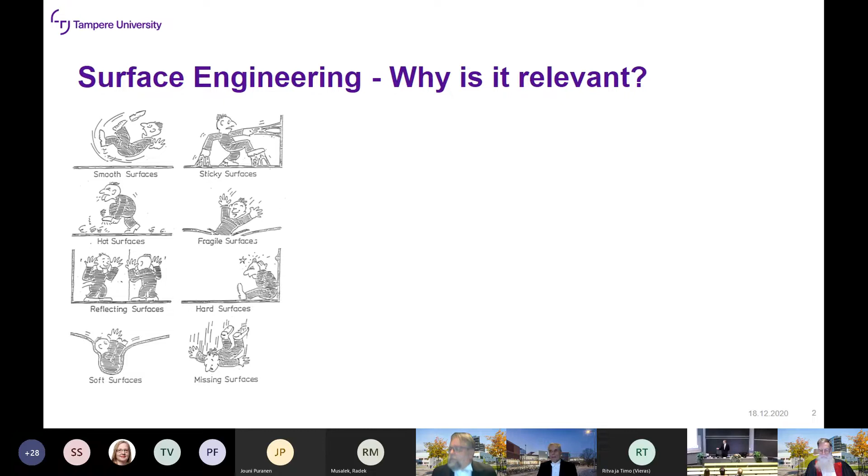Some everyday examples of this could be painting a car or a house, or lining a football field with fake grass, for example.

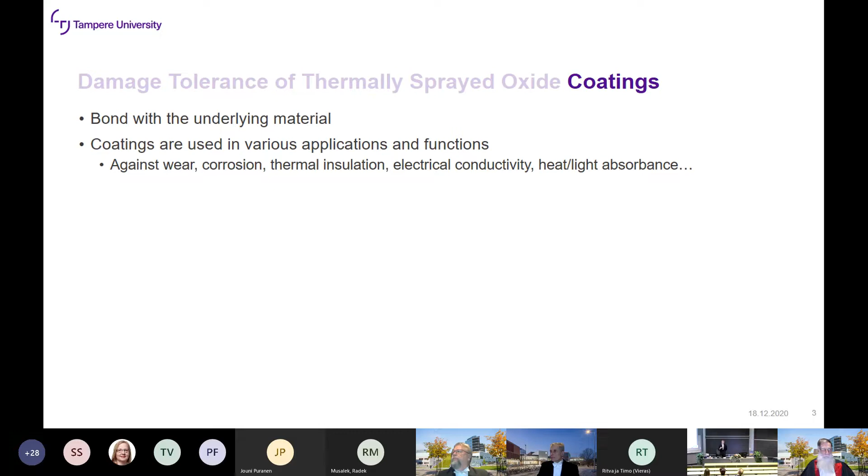Coatings are surfaces that bond with the underlying material, separate from the parent material. They're used in various applications in industry for wear and corrosion protection, among others.

They can be thin, which would be under 10 micrometers. For example, this tool tip insert could be coated with a thin coating. What I call thick coatings would be upwards of 10 micrometers up to 1000, so 1 millimeter. Not really thick, but still in the scale of our studies, that would be thick.

And above that, I would like to call these clads, because you can clearly tell two different layers of materials separate.

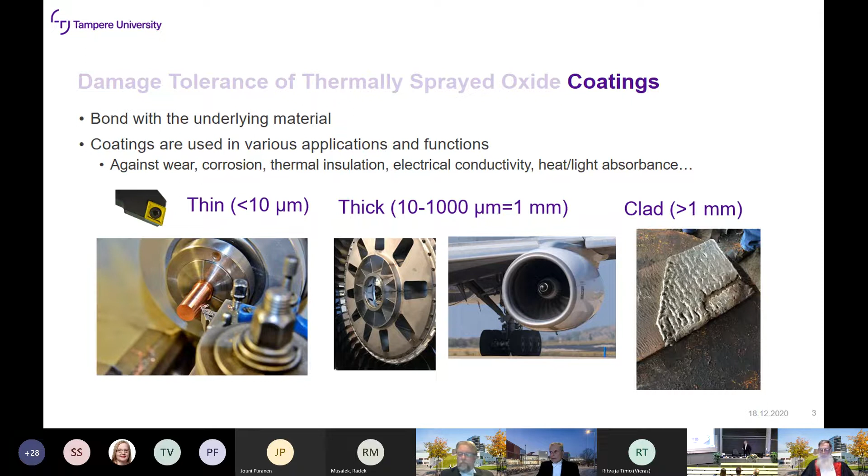What is thermal spraying then? Thermal spraying is a method of manufacturing thick coatings, so between 10 and 1000 micrometers. They can be virtually from any material group, so metals, hard metals, cermets, ceramics, or polymers.

And to make those, we need heat to melt a material that can be in the form of powder, wire, cord, rod, or more recently liquid suspensions or solutions. And once we have this molten material, we need to propel it towards a surface which we want to coat.

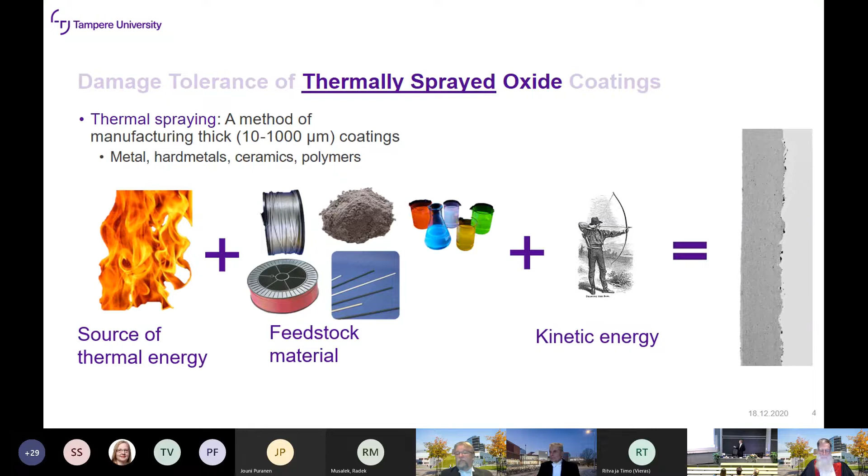After this, the molten material hits the surface and makes a coating such as this one. The gray part here would be the coating, ceramic in this case, and a metal substrate.

These coatings are used in, for example, batch production, such as this ball valve for process industry that's being coated with a hard metal coating. We coat one ball and we stop the process, switch it up, and resume with the next one.

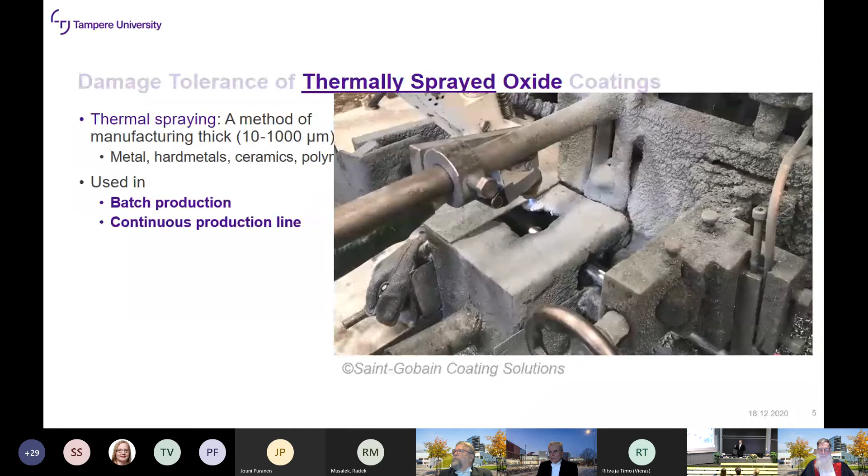And it can be used in laboratory scale. Like in this case, there is a coating for my study being made. So even really small pieces, downstairs here at the university.

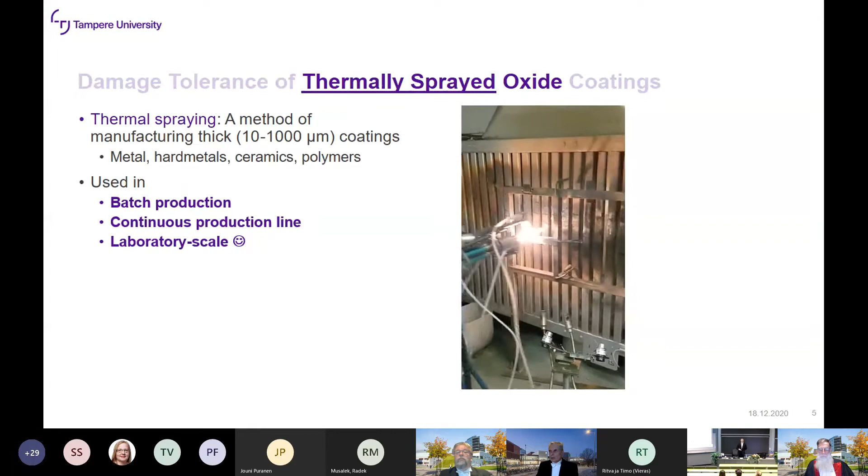Some common applications of thermal spray coatings are, for example, possibly the biggest market is in aerospace, in turbines, as ceramic coatings against heat to prevent the metal from melting or heating excessively. And in the landing gears of airplanes to replace hard chrome that is nowadays a toxic material to use.

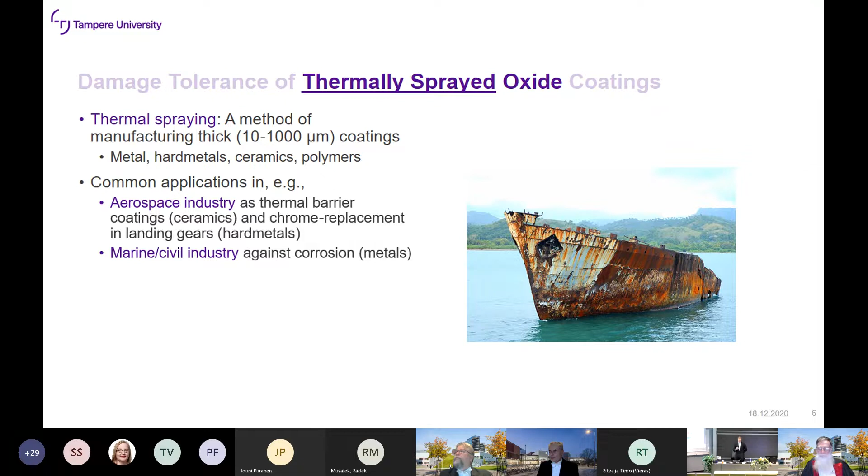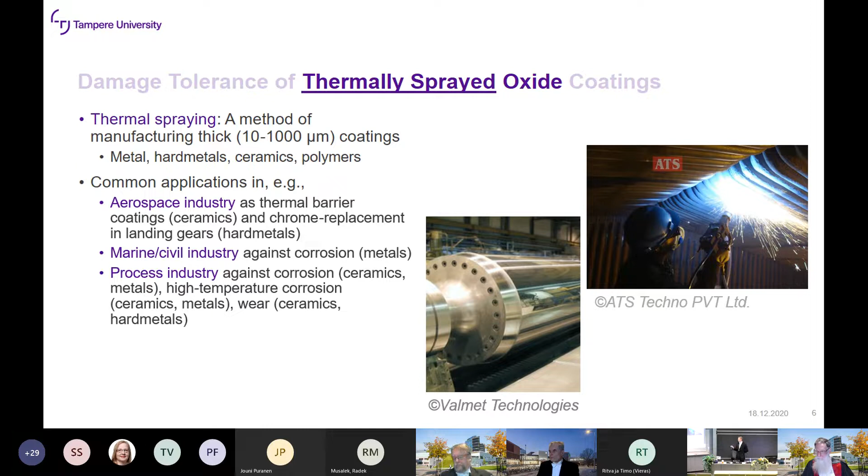It's also used against corrosion quite widely in various industries. Metal coatings, shipbuilding is one big area where we use corrosion protection coatings. And it can be used in process industry also against wear or corrosion or both, such as paper machine rolls or in energy production boiler tubes.

Now, thermal spraying itself is a value-adding technology, meaning that in most cases, the components would work without a coating quite well, probably a bit shorter time, but they would work. By applying a coating, we can increase the lifetime of the component, maybe 5 times, maybe 10 times, maybe 2 times. And in some cases, it's not worth it to apply a coating.

But thermal spraying by itself usually can be replaced if there is a better option, for example, from thinner coatings in thin film technologies such as chemical vapor deposition or physical vapor deposition, or thicker coatings, clads from laser cladding, PTA or welding. So it is really a niche technology between thin coatings and thick coatings, and its use is quite niche as well.

And typically, the technology develops from industry pull. There is some current need of a current component that could be made even better with a coating. It's not so often we see this type of research from the bottom up, starting from scratch to build some new application. But that happens as well sometimes.

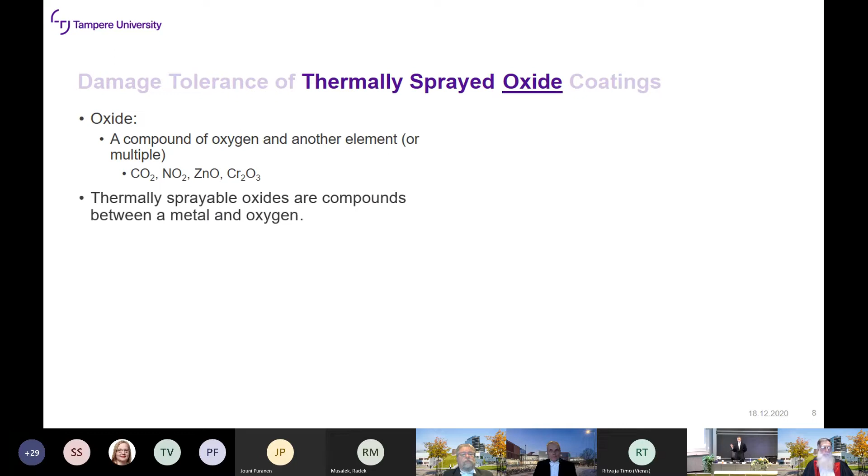Then what are oxides? It's a compound of oxygen, O2 or O in a compound, and another element or multiple. And what we thermal spray are compounds of metal and oxygen, which are ceramics - it's a fancier way of saying oxides. Usually we talk of ceramic coatings, but they're most often oxide coatings. And the most often used are aluminum oxide or alumina, chromium oxide or chromia, titanium oxide or titania in my study.

Possibly the most used is zirconium oxide, but pretty much any oxide could be sprayed. And it can come in almost all feedstock forms, not wire, because ceramics are difficult to make a wire from. Now, thermally sprayed oxide coatings, what are they? They are chemically stable for corrosion protection if they're dense. They resist sliding wear, also other types of wear, but really against sliding wear they're really good. And they have good release properties where that's needed, low surface energy, and they're hard.

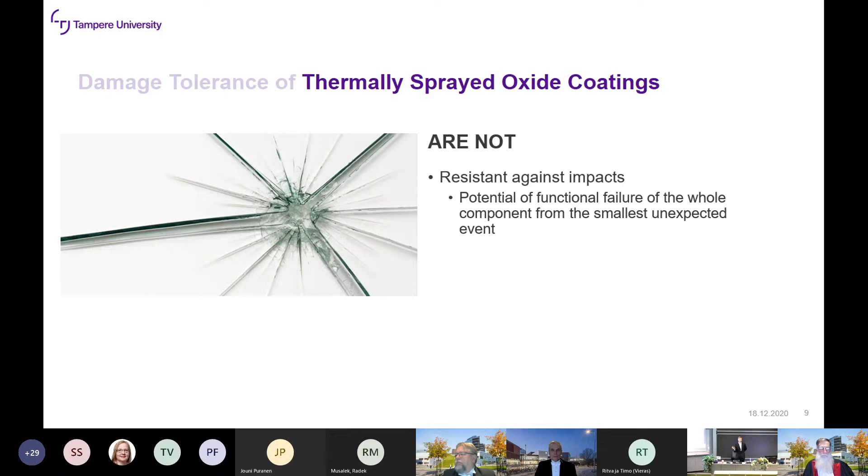What they are not is resistant against impacts. As many of us know, ceramics are very easy to crack. And that, in the case of a functional coating, often means that the whole component is out of use after this. So this would be the industry pull in my case. The damage tolerance would need to be increased, so less cracking of the components.

And thermally sprayed oxide coatings have a ton of flaws. The process is stochastic. There are uncontrollable or difficult to control factors which lead to porosity, unmelted particles, cracks, etc. And it's very difficult to eliminate these totally. So most often we try to find the best balance and control them as well as we can, and to find the optimal properties, which means compromise. Some property goes up, some goes down. Most often we haven't found the perfect solution to make everything better.

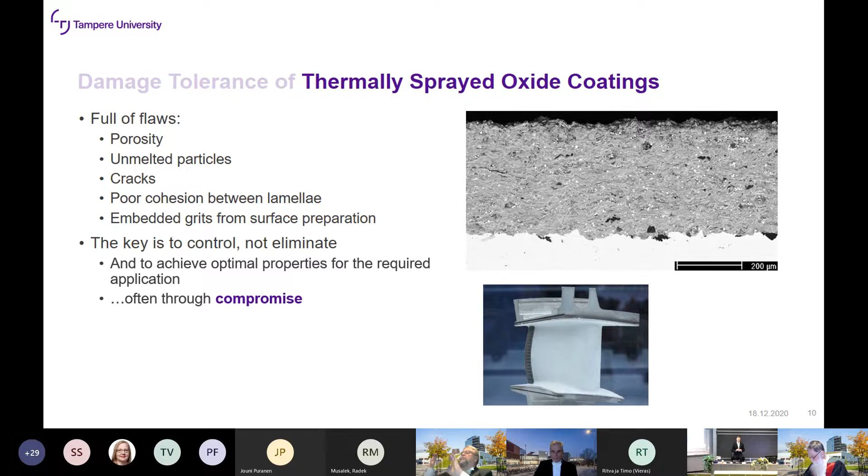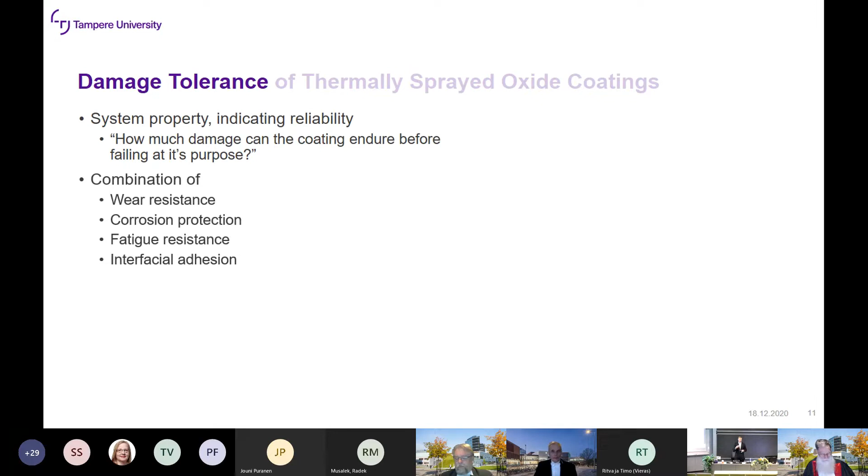Now, damage tolerance itself, it's in the name, but in simple terms, it means how much damage the coating can endure before it's unusable. And it's a combination of many things. It's not just wear, but there can be fatigue from thermal cycling, adhesion problems, corrosion. And in this study, for example, we've studied the cracking behavior up close, trying to quantify this phenomenon.

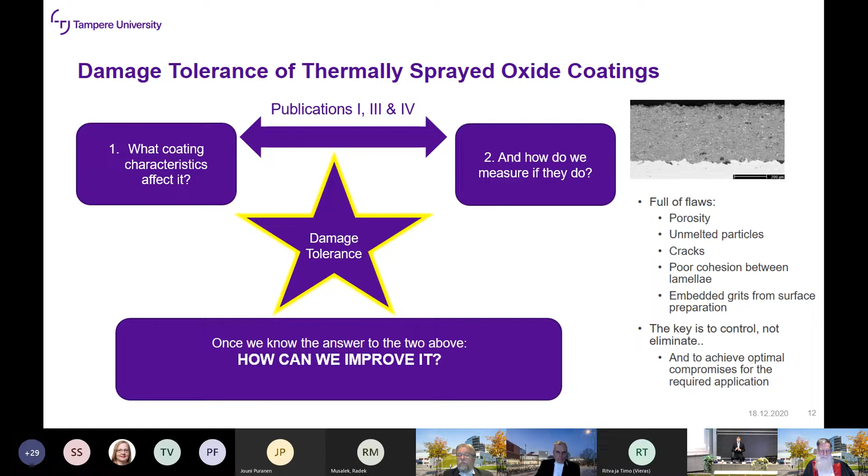Okay, so finally, the holy grail is damage tolerance. So how did we approach it? First, we need to figure out what coating characteristics are at play. How do they affect damage tolerance? And how do we measure if they do, which is a challenge by itself. About half of the thesis is about these topics. And once we know this answer, how do we improve it to make a better coating? Roughly half of the thesis is dedicated to this topic. Thank you.

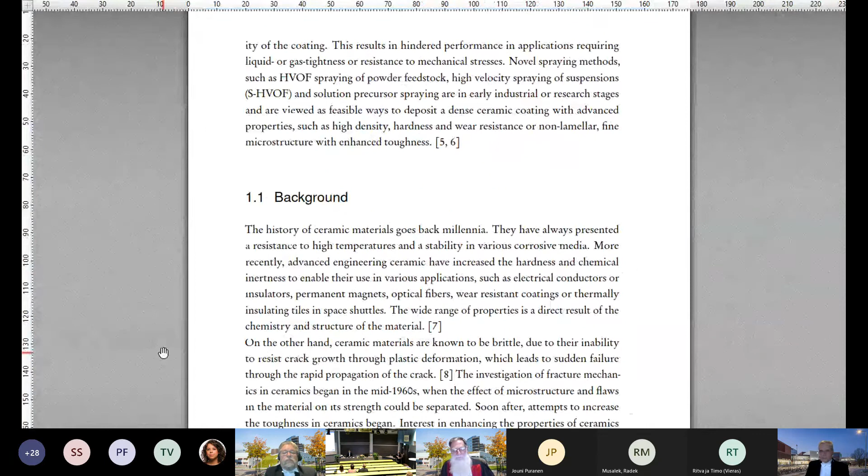So let me actually pick up on that, if I may. One of your key ideas, Jarkko, seems to be toughening and strain tolerance, looking at stresses, and I'm referring to the introductory pages of your thesis, pages 23 to 25. There is a lot of discussion and a lot of thoughts about toughening. So this is another holy grail with regards to this technology. Yeah.

And I don't completely understand strain tolerance. So could you please explain to me, or actually to the world who is tuning in, what you mean by strain tolerance for thermal spray coatings? And it'd be interesting to get your thoughts about how strain tolerance can be controlled. Would you be able to just expand a little bit on that, please? Is my question making sense? Yeah.

Well, first of all, it's not a question. This is just an inquiry, right? Yeah. Strain tolerance, I see it as, for example, with this coated component, you would pull it apart, the substrate deforms elastically, and the ceramic coating at some point couldn't take this strain anymore and would have signs of cracking. So whether it's 1% of strain or 0.5%, 0.3%, to me the first sign of cracking would be the limit for this coating. And that is my idea of strain tolerance in this thesis.

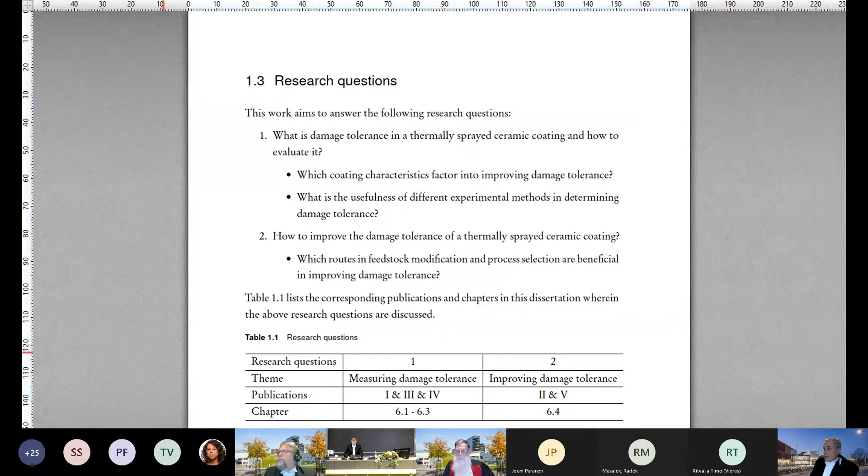Okay. When we advance from this background, we come to the aim of the work. I think it's well defined, twofold. There's like two frontiers. One is the understanding and characterization of damage tolerance, crack propagation resistance, impact resistance, and second goal is how to improve them. So how to understand, how to improve. It's a lot of things, and it's divided into research questions, and the answers could be found in publications as in table 1.1.

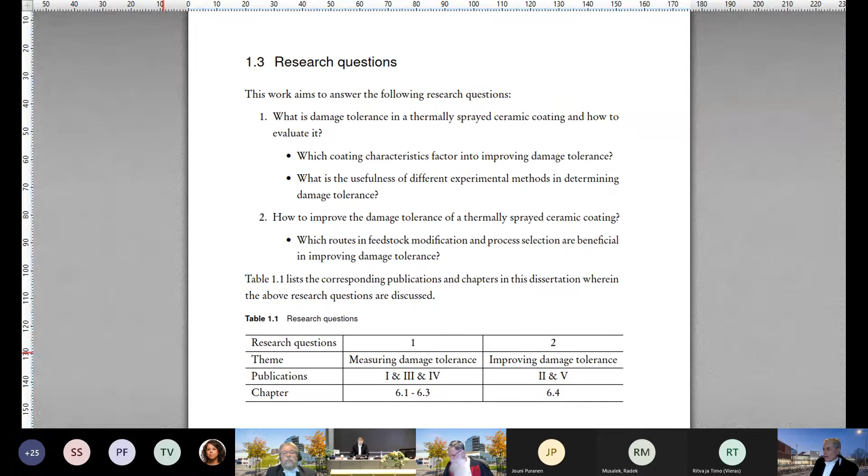If we come to the very introduction of the thermal spray, I think we always see this figure 2.1. It's like, this is thermal spray. This is the splats forming the coating. Then you show that one image, 2.2. It's an image of a copper metal splat. Can you explain how that describes the process that we are dealing with, ceramic coatings, this being metal, and how would it be very different?

Yes. In my mind, the phenomenon would be the same for molten ceramics, and I was wanting to find the best picture to describe this splattering during spraying. So in this case, it was molten copper instead of molten oxide. But as I see, compared to the coldish substrate, the phenomenon would be the same. The temperature difference is high in any case. If you agree, I don't know. Well, yeah, I guess the phenomena are similar.

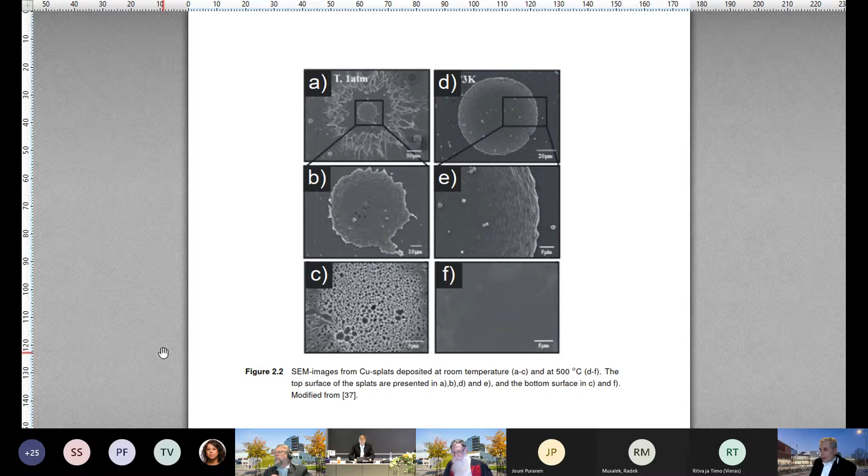If I still go deeper, in the following picture, 2.3, again, the dynamics of the splat formation. How would you use this type of image and take into account, let's say, the important ingredient in development of these coatings in this thesis, the nanomaterials? How would the nanoparticles show in this type of an image?

They would still, I think it would be the same image, but in a smaller scale. Of course, if they're very molten, they probably wouldn't stay nano. There would be crystal growth in this case. So maybe a splat so flat would need to be very molten and not nano anymore. But that's a tricky one.

So if I could just chime in here just for a little while. These are the classical figures that we always see. And I'm just wondering whether Jarkko could describe a little bit more about surface roughness effects with regards to splatting phenomena. What happens when you get to second, third, fourth, fifth, sixth layers? Whether the modelling, which a lot of people do, is of interest. Whether you could help the audience and me understand just a little bit more how roughness and other practical aspects influence these wonderful cartoons that we always see. Jarkko? Okay, I will get a chance to use the blackboard.

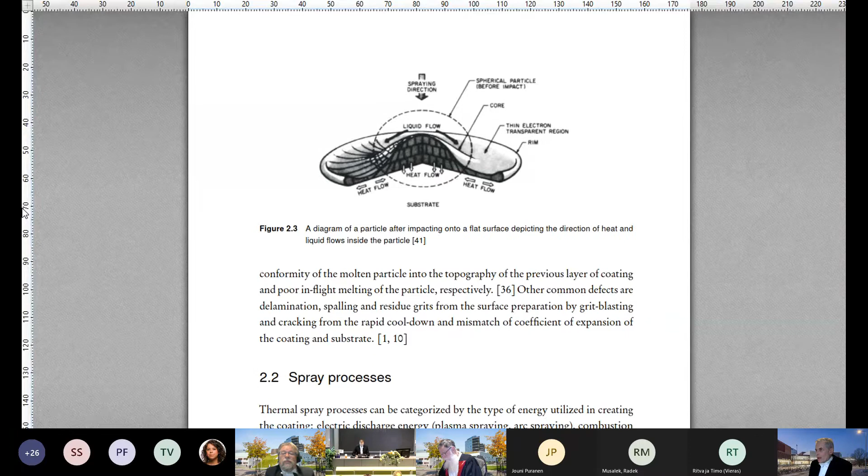Yeah, if I want to continue a little bit with this same theme, in the thesis there's described all these different thermal spray methods and their advances and characteristics. Then there comes this chapter 2.3.1 on properties, mechanical properties. It's not a table, but it's this one that you show the different features.

So I think these are related. What are the processes related to the splat formation that actually affect not only the cooling or spreading of the molten or semi-molten particle? Can you describe? You are talking of this stress generation, residual stresses? Yes. Yeah, well, there is, of course, the thermal effect from the quenching, as is the first part.

And the splat will have some property as it first arrives, and it will be altered by the consequent splats that come after that. In this case, it's peening stress. Like mentioned here, with ceramics it's not seen as such a big effect because they are already quite solid and hard. They wouldn't deform so much, so potentially they could crack from the incoming particles. And finally, the thermal contraction comes from the difference in thermal expansion of the substrate and the coating.

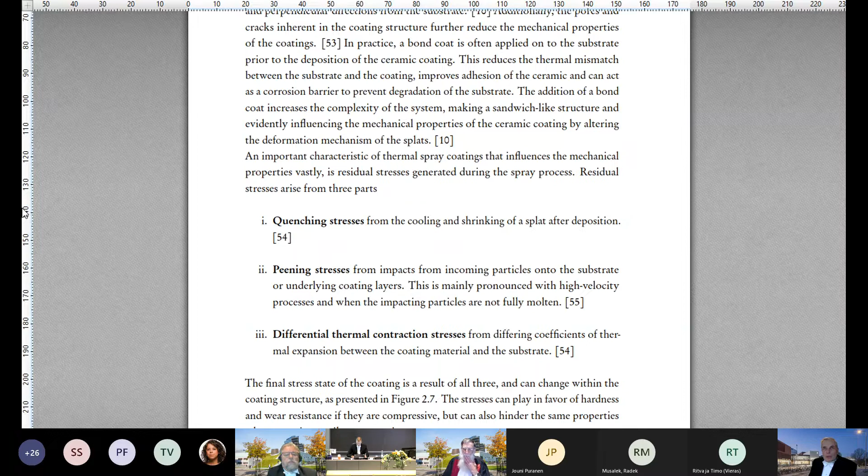But then can you describe the differences in the coatings? I think it's quite critical. Most of these coatings are in tensile stress, but some of them are in compressive stress, which is a big difference in the mechanical properties. Can you elucidate that in different materials using this figure that you showed? Yeah.

Well, ceramic coatings generally would be in tension because of the lack of peening stresses. Plasma sprayed coatings almost always, I want to say. The compressive ones that I did find were HVOF sprayed coatings, and HVOF spraying of ceramics requires a lot of heat and gas flow, and we heat the substrate so much that it expands. So after it cools down, it compresses the coating. It's not from peening, it's more from this cycling. So the thermal load in HVOF is higher to the substrate.

Yes. It's a lower temperature than a plasma, but there's so much gas going that the heat transferred is higher. With the chromium oxide, you tend to get this compressive stress, especially because it has a high melting point and we need to crank it all up with the HVOF, as much gas and as hot as we can, and hope it sticks. So it heats the substrate a lot more than the alumina or titania that we try. I see. Okay.

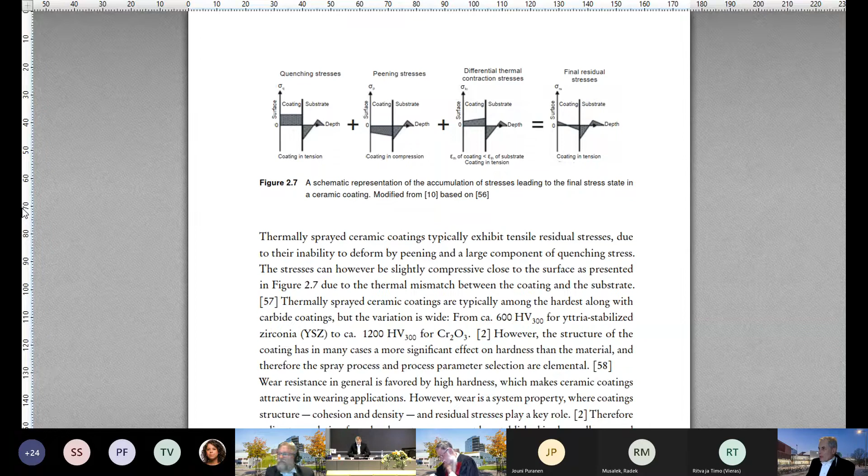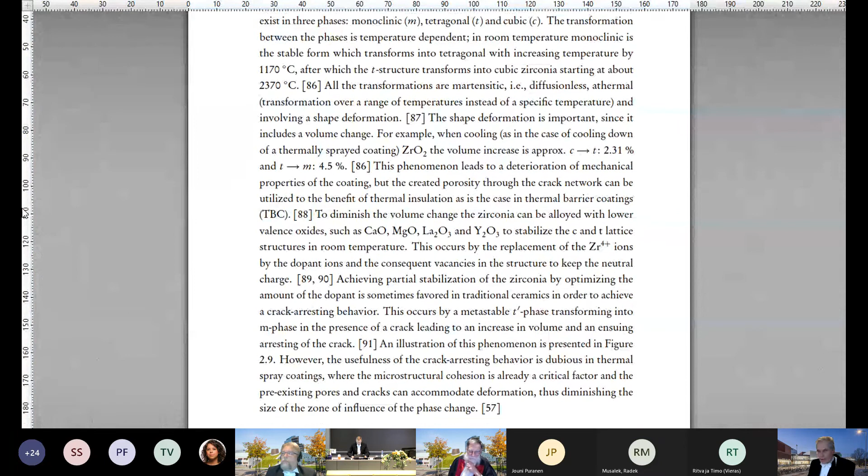It's touching the different materials, ceramic materials, in a very nice compact way. What interested me is this functional property of this zirconia stabilized material, where you have this crack arresting behavior. That sounds nice, to arrest the cracks. It's on page 43, I think. Yes. Can you tell more about that? You conclude here that the usefulness of the crack arresting behavior is dubious in thermal sprayed coatings. So is there something to look for, or is it doomed to be not important ever?

There's something to look forward to if we could create dense enough coatings, possibly. But for now, as I mentioned in the lecture, there are pores and cracks and voids, discontinuities inside the coating that have a larger effect. So this crack arresting I can't see, and I've tested it with various methods. I didn't find an effect, and probably it's because the crack won't be arrested if it has a pre-cracked route to go around, or a pore to enter, the lowest resistance of propagation.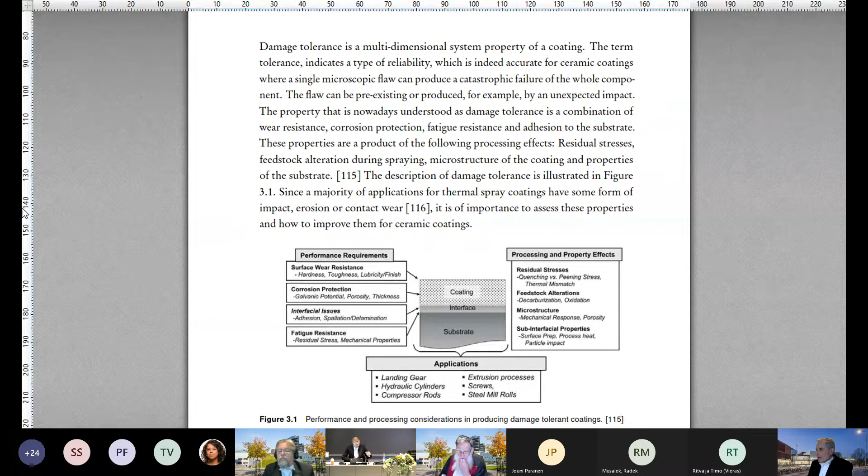I want to go a little bit further, not very much, but is this figure 3.4 something you're discussing as nanostructures stopping the crack growth? To me it looks like some unfortunate damage, if it is an indentation spot. It's really difficult to see anything, but maybe so. Yeah, this is exactly that, actually, from this publication that I remembered the topic probably from. Okay, so it doesn't replicate the tip shape by any means. It's just a crack, but maybe it's minute compared to the expected, or something. Yeah, of course we can see what's outside of this one micrometer image.

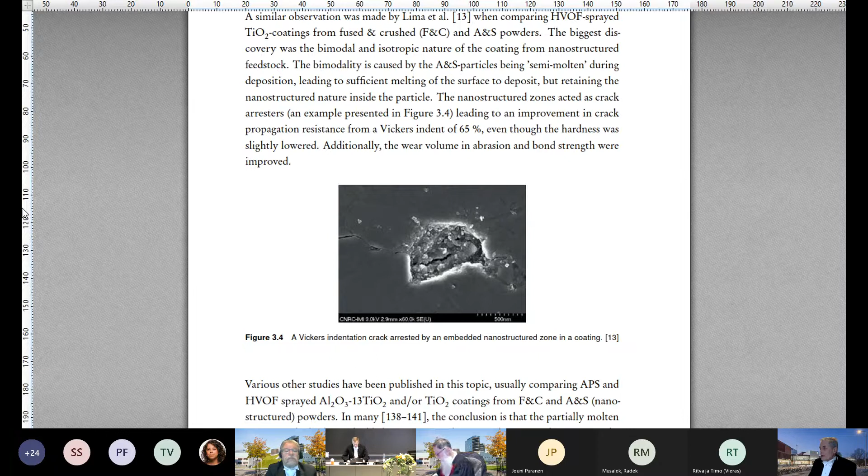Okay, we come to the next subject, chapter, nanostructured coatings from liquid feedstocks. Do you have evidence that really all these ceramic nanoparticles would be melted in a process? Wouldn't they?

Yeah, if they are isolated, they would be melted. Maybe some evaporation might take place if they are really small. How do they survive this molten flight and all that? Can you describe some of that? What happens to the nanoparticles when you melt them and put them into the process?

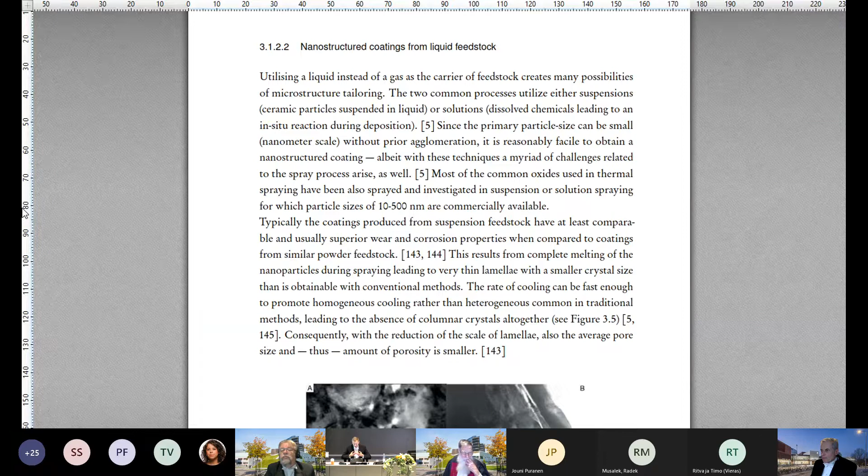Well, yes, if they're large agglomerates of nanoparticles that melt, the particles would start to melt from the surface, and probably we wouldn't have a nanostructure soon after. But inside the particle—so actually, often when we find nanoparticles in a coating, it is unmolten particles that are embedded in the molten matrix of the coating. And in these cases, for example in solution precursor spraying, when the nanoparticles are formed in situ in the flame or in the plasma, then I think they are reasonably isolated, and for the ones that are not, they have less time to melt.

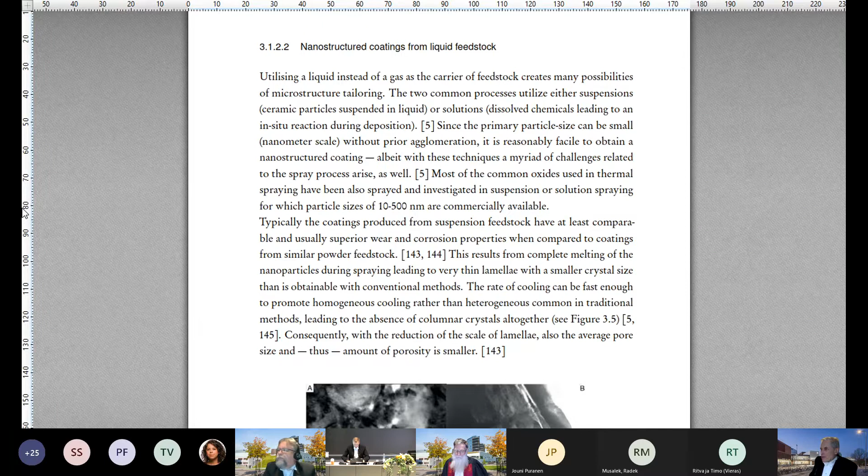Yes, I guess it's really an academic question. It would be very difficult to actually characterize that and see what happens. But I would basically repeat the previous question that I had at the quite beginning: have you ever seen images of nanosplats?

No. Are there any? I suppose not, and it would be because the coating, most often our nanostructures are still a mixture - it's a multimodal kind of structure. There's nano areas, there is micron-sized areas. So if I look at the coating from the surface, you could maybe see some small nanoparticles here and there on top of the coating. That's what it would look like from the top, in my opinion. I would imagine it's quite difficult.

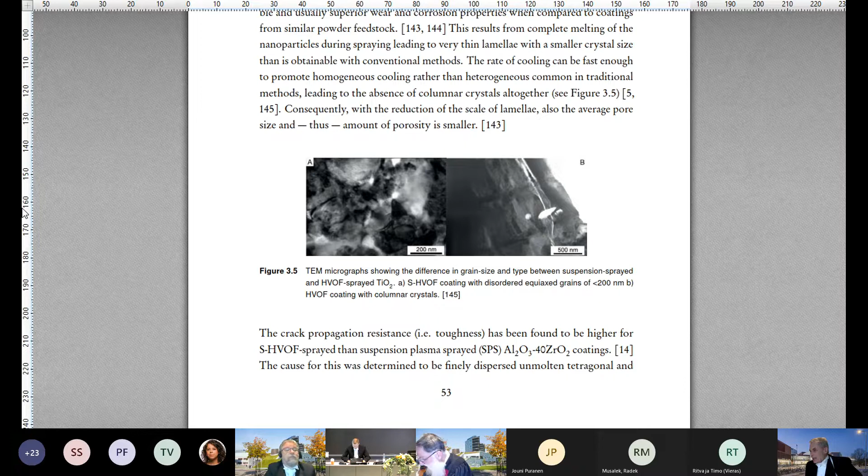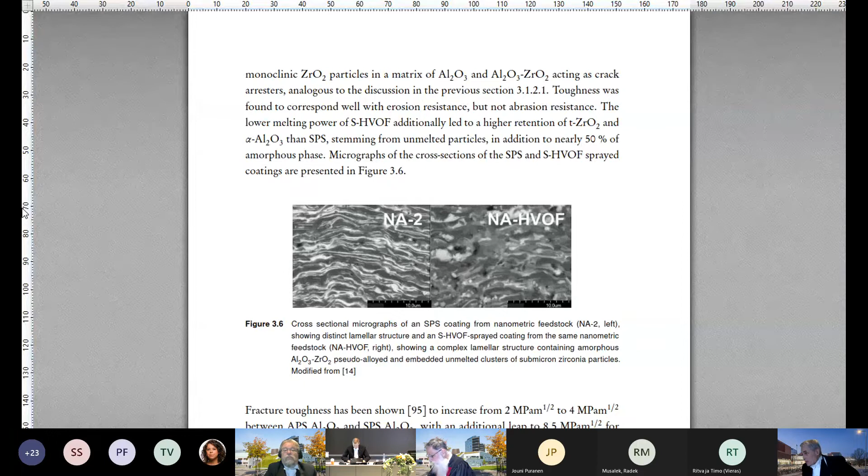I refer to this image 3.5 and 3.6. In 3.5, you mentioned in the S-HVOF, HVOF, that we see small grains. Would these be something to do with the nanoparticles in the process, or what? And similarly, it's claimed in the following picture 3.6 that - or do we see some nano phases there? Taking into account this very low magnification, could we see anything?

Not really. I think in the right one of figure 3.6, there is the nano HVOF that has a lower temperature than the plasma spray coating on the left side. You could see these clusters, white clusters, that would be the zirconia, quite poorly embedded. It looks just like the coatings from one of my publications, where there are actually almost discontinuities of unmolten or poorly molten zirconia clusters. And inside that, you would probably find nanoparticles if you would zoom in. But then the benefit of these particles in this form is a bit in question.

Yeah, I agree. I think you have in your publication similar images. So some of the nanomaterials actually make an agglomerate, and they fly along with the particles, and they land as an agglomerate, most likely having the nanostructures within.

I may still continue a little bit. Still under this image 3.6, there is this fracture toughness increase. There are significant numbers related to nano and this improvement with different nano materials included. So there's really an increase in toughness values. So it seems like a very attractive field, nevertheless.

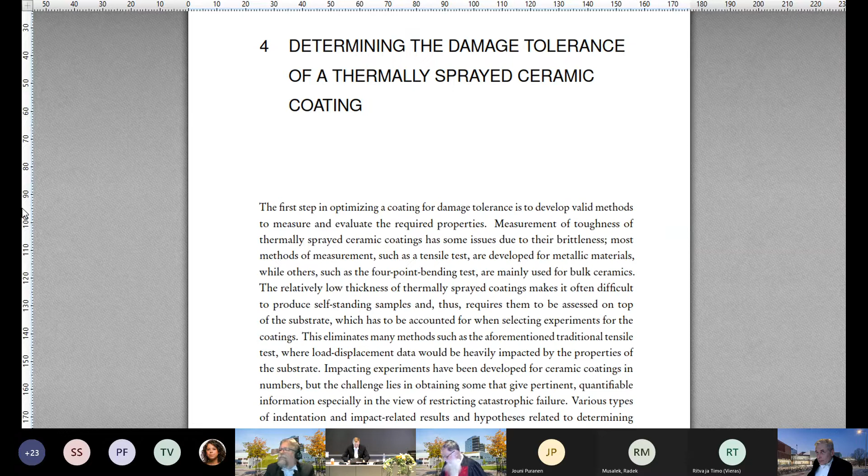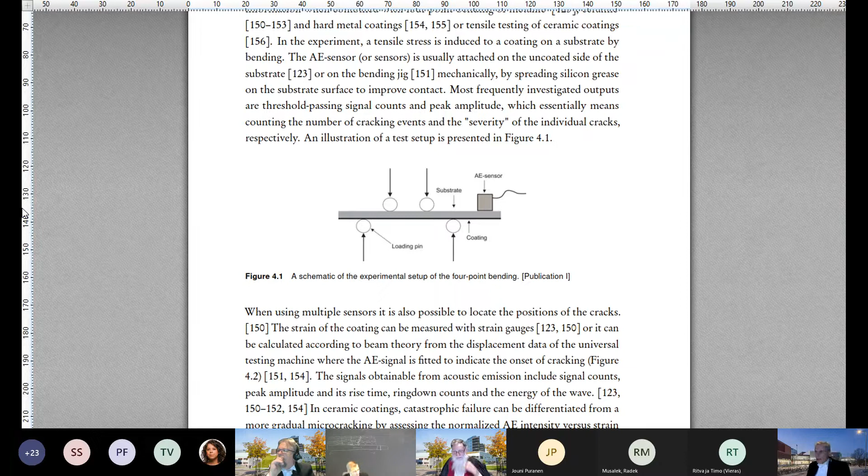So go back to figure 4.2 and postulate - you've already done your thesis, so don't worry about it, I'm not asking for further experiments. I'm trying to work this out myself, and I'm wondering whether you can help us as colleagues work this out. Do you think that the AE would start at 0,0, for example?

And Jari, please chime in if you'd like to help Jarkko and I work this out. Well,

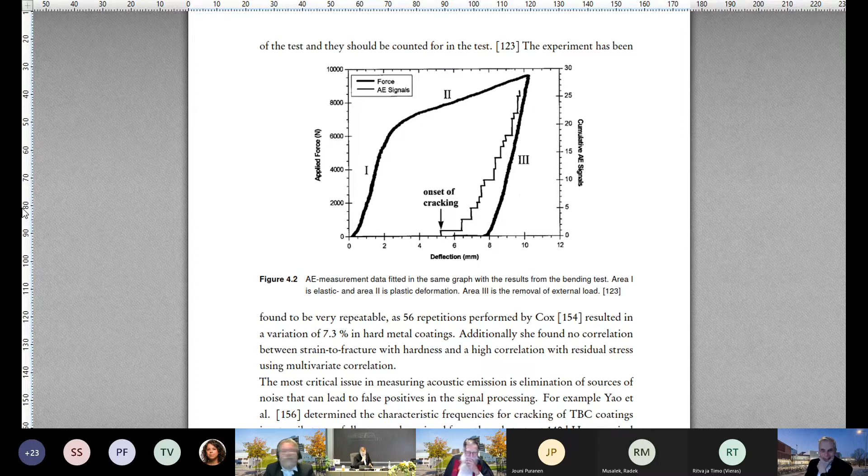Well, first of all, this 4.2 - I didn't check right now, but it seems like it's not a ceramic coating since the cracking starts quite late. Okay, but thinking of a ceramic coating in compression, I'll draw again.

It's good practice. So I would have this same - I'll make it a bit simpler - the coating now. Make it a cake. And you start compressing, which would essentially be the bending test in reverse.

So you would have this ceramic here in compression. So you'd probably - this part would bend for sure since it's metal. This part would want to bend, but it might resist a bit. So we would see delamination here, and afterwards, probably some V cracks as a crack comes and the coating gives in.

But as to when it starts, I think it would be really - hopefully before tension. In that case, it would be more damage tolerant in tension, I guess.

But it's interesting - I think it's a good question because a lot of your experiments, in fact, produce compressive test stress states. Well, they're a mix of everything, all of them, but nevertheless it's compression in a lot of cases. So it's a good point.

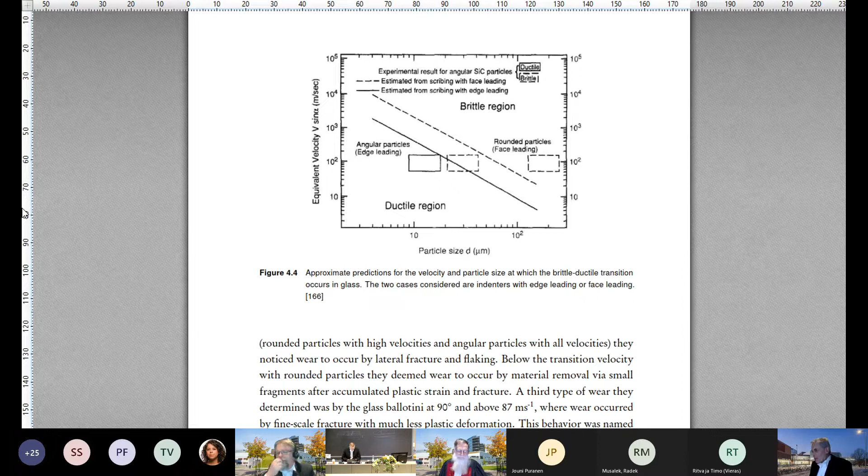Depending on the particle and their angle, you get different results. In all areas of abrasive jet wear mentioned here, there are still considerable contradictions and gaps in our knowledge, considering the importance of abrasive jet wear. Elimination of these contradictions and gaps would seem to offer a rewarding problem for materials development. So it's a very strong opinion to make that type of conclusion in a paper. You have to have a good name to get it published. Okay, but that's already 25 years ago.

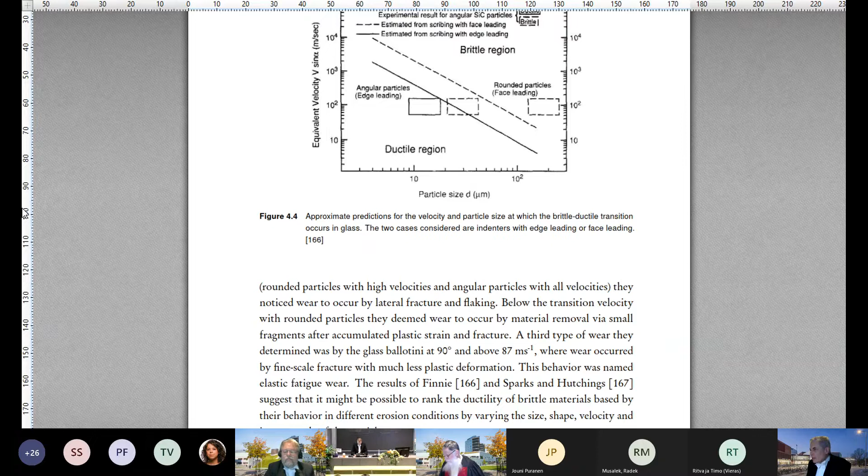How about going to materials and methods, closer to what was actually done? I have one question. Basically, you have carried out a large set of experiments varying this and that parameter, but I don't recall ever seeing a statistical experimental design used. Wouldn't that cut some corners to find some interesting parameters, like in paper 5, where you vary a number of parameters? Did that occur ever?

Yes, and indeed, I like paper 5 because we did quite a thorough search, not a design of experiments by any means, but more of a still spending time. And I guess many of the publications and the thesis itself is a picture of the times. It's different interests that evolved during the thesis, and at some point there was a high interest to test many materials and to do such an optimization to all of them.

Unfortunately, in thermal spraying, there are so many parameters and outputs. You first need to define your output, make sure it's good. Then you need to define the parameters to change for each material. So yeah, we didn't do it. If I had funding for 5 years to study this topic again, I would choose fewer materials and go more thoroughly through them. Okay.

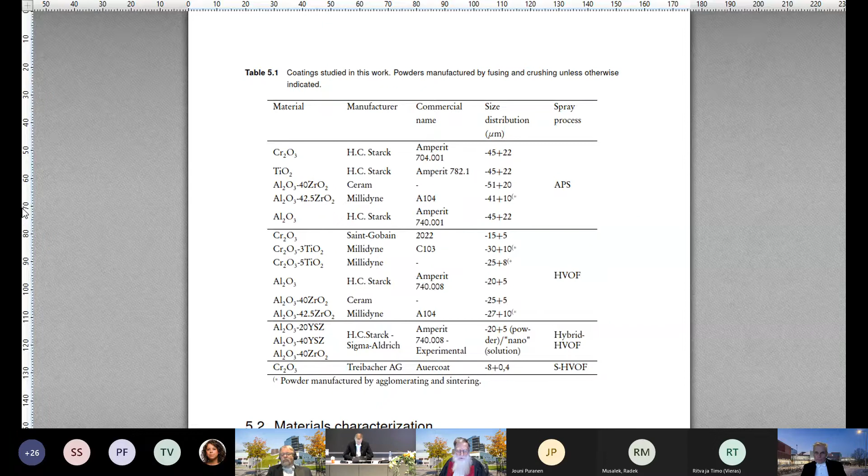So when you look at table 5.1, is it correct to say that you only used off-the-shelf available commercial materials? Not exclusively. For fused and crushed powders, yes. For agglomerated and sintered, we did some collaboration with Millidyne, for example, Chromia 5 Titania. I can't say on their behalf, is it commercially available? Has something been changed? Is it a development project on their end too?

And then the suspension was commercial at that point already, and for the hybrid spraying the constituents were commercial, but we mixed it ourselves. So I guess my real comment or inquiry point is, and maybe you've already answered this previously, but it's worth repeating to the younger people: do you think there are opportunities for other materials, other powders, other than those that you've got listed, to form damage-tolerant coatings?

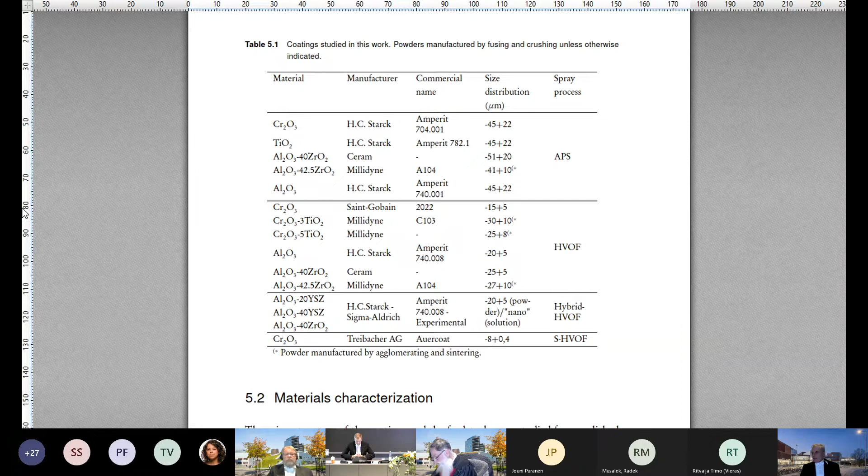About these characterization methods, I find this high velocity particle impactor exotic and interesting. To me, it looks like simulating the catastrophe. Yeah, don't do this in your manufacturing facility type approach. So what you actually do, you shoot the surface with a heavy bullet, and basically you know that it will be killed. Is this a type of experiment where you would not be able to gradually increase the speed of the bullet and change the location, and then afterwards look at what you actually did? Now it seems like you are looking at the dead body and trying to figure out what happened.

There was a high-speed camera involved that gave beautiful videos of ceramics shattering. But at that point, that was the characterization, but it wasn't really live. It also had to be processed after. A load sensor could be interesting in this one as well. But as it was now, we could change the velocity and the size of the bullet, as you said, and see what remains.

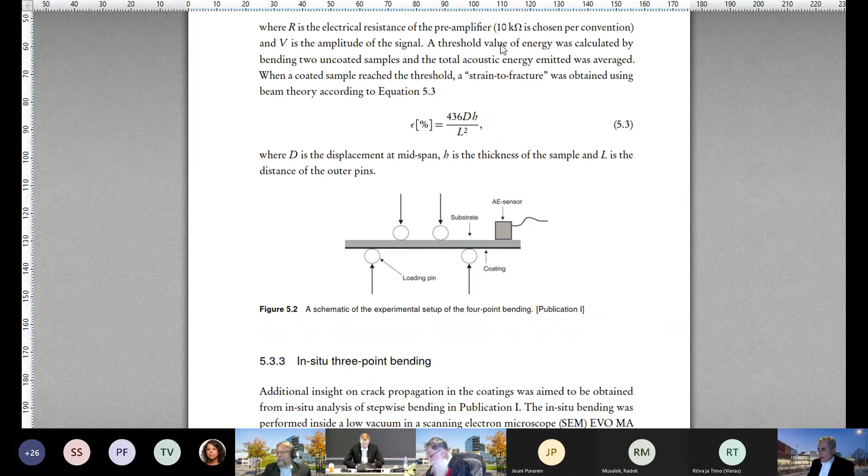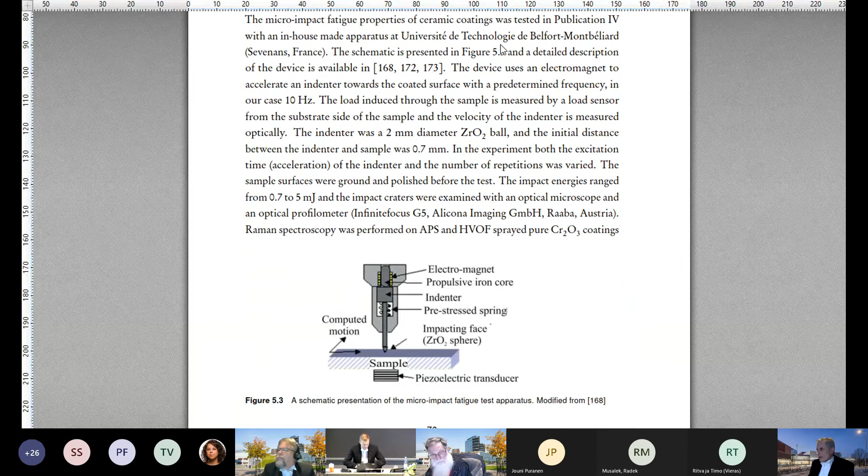And the micro impact fatigue, it seems to be the champion in some of the best results that you obtain here. Just a little technical question. Why do we have such a weird parameter as the excitation time, instead of load or velocity or energy of impact? Wouldn't there be a direct correlation?

There would, yes, but I wanted to use the input. The impacting sphere, or this rod, was accelerated by electromagnets, and we could change how long we accelerate it for, and the rest it goes by its own weight. So this was our input. Then we measured the velocity with an optical sensor, but it's not always exactly linear. Increasing acceleration time, or even keeping the same one, you would get small variation in velocity. And I think it also has something to do with measuring the velocity.

So also to make my later tables somewhat sensible, it was nicer to use 0.7, 0.8, 0.9 that were the same for all coatings in the same column, instead of putting the individual velocities and energies. I did calculate those too and tried, but then it would have been a mess to understand. Okay, yeah, maybe there's some development potential in this device still.

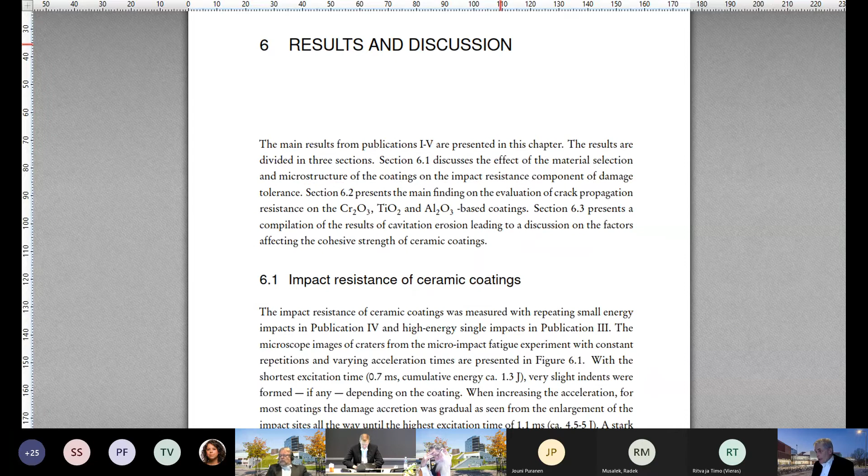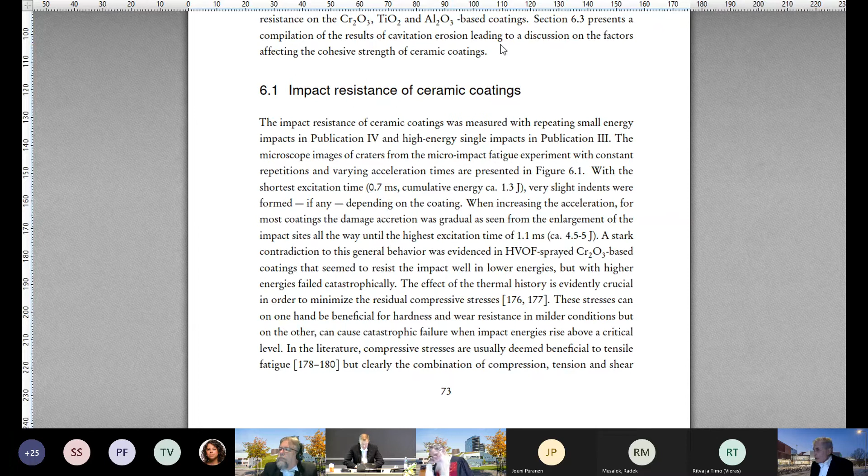Very good. So it starts with this impact resistance experimenting. So you have two approaches used. One is that you hammer the surface 1,000 times, but you have a different impact energy in each. It's test impact, and then you look at the outcome. Or actually, yeah, so you let it hammer 1,000 times, and then you see what happened. That's the first process. Was that also the first process to start with?

There were a few experiments before, but not many. Thing was, I traveled to France for 5 weeks with a limited amount of samples. So we tested a few samples to find some parameter idea. They hadn't tested thermal spray coatings as such before. So we had to find some window where to operate, make good guesses, what are the parameters that we want to try. And yeah, after that, there was not very much optimization.

I'm not so sure, but tell what type of literature is there on these similar types of experiments? Is this a frequently used method, even though not used with this French device? For thermal spray coatings, I haven't seen many publications. I know the existence of a handful of machines, maybe 3, all different. It's not the same design. I don't even know what the others look like. So I presume they have been used in some projects, maybe industry projects, but publications I didn't find at that time anyways.

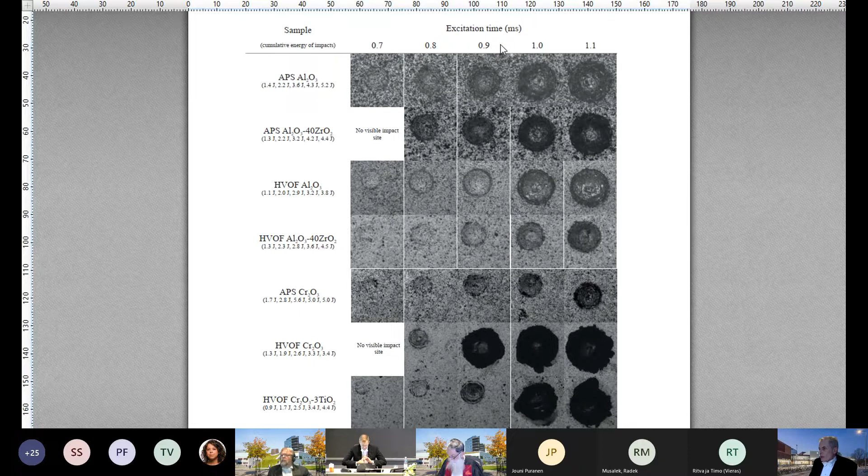So if I may continue, then the second approach is to select a load. I wonder how was that selected? This is maybe deduced out of, it seems to be close to the maximum excitation time that you use for the increasing time of impact. So you make 100, you look at it, you continue. No, I guess you make 200. You don't try to aim at the same place, but then you get an advance of what's happening.

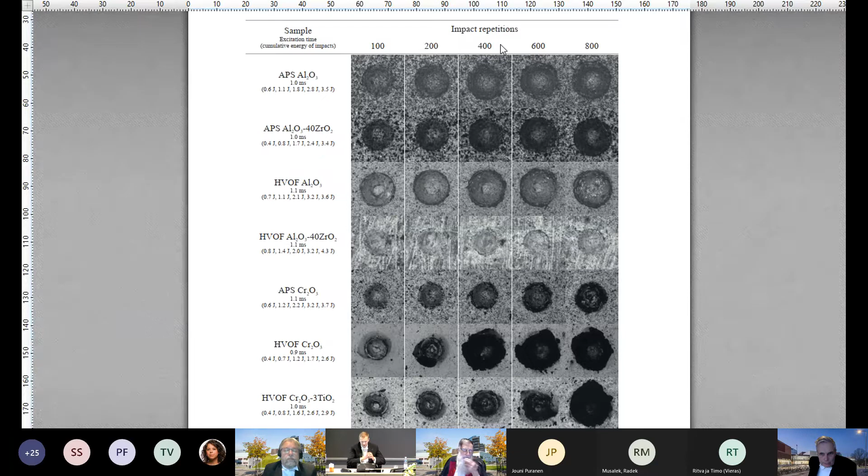Yeah, actually, the testing itself was really fast. Well, I chose the excitation time based on, and that was the tough part, determining when this coating has failed. I changed the excitation times with a constant load, constant impact repetitions, the number 1,000. And I looked at the micrographs. I was there on site, so I hadn't done the analysis yet. And I looked where it broke, chose this as the excitation time and tried to find the point where it doesn't break. Can it take 100 repetitions or 2 or 3 or 4?

But the test itself is really fast. I could program it to do like 100 and then move 5 millimeters to 200 repetitions. So I did these all, and then I went to look at them in the microscope.

Yeah, I think it's a very elegant way of determining when you measure the cavity dimensions. Then you figure out at what stage the increase takes on. So the speed of erosion is highest, and that's the critical point, and you say that's the required impact energy for failure. Did I understand right? Because it's like that criterion for this 6.3. Yes, there it was basically the number of repetitions times the energy of one impact would be the required impact energy. Okay. That was the attempt to quantify this quite artistic approach.

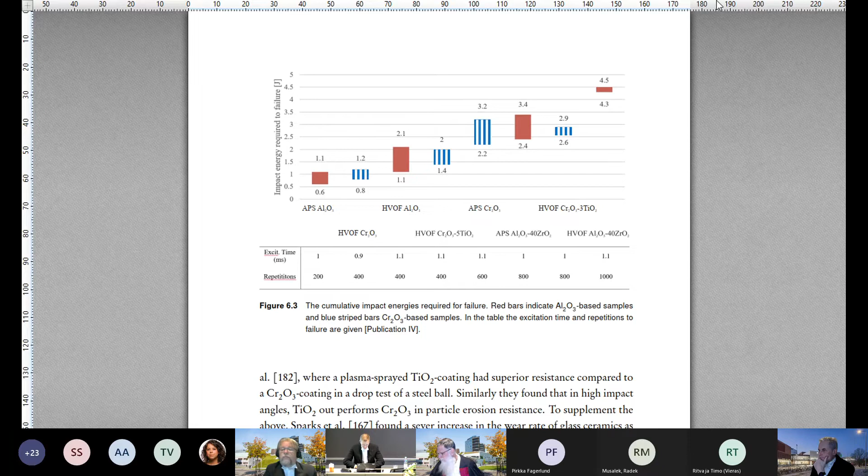I think that the discussion point is really that this is potentially a very good way to decipher some of the mysteries that exist for thermal spray coatings. Now, I have one final observation about figure 6.1. So bear with me, this is a really weird one, right? When I look at these, I'm looking at craters on the moon, right? Now, here's an observation. Is there a self-similarity?

Is there a fractal concept here with regards to scales, really macro, as in the moon and all the seas formed in the moon, and really micro with regards to this test? What are your thoughts about that, Jarkko? The point is self-similarity of fracture mechanisms on something truly macroscopic and something probably 7 decades smaller. Do you know much about fractal dimensions? Not that much. Can you talk about self-similarity and whether there is an analogy with a macroscopic behavior? It could be cavitation erosion, for example, in industry. I just used the moon as a very large scale one. And I invite Jari to jump in with any clarifying comments.

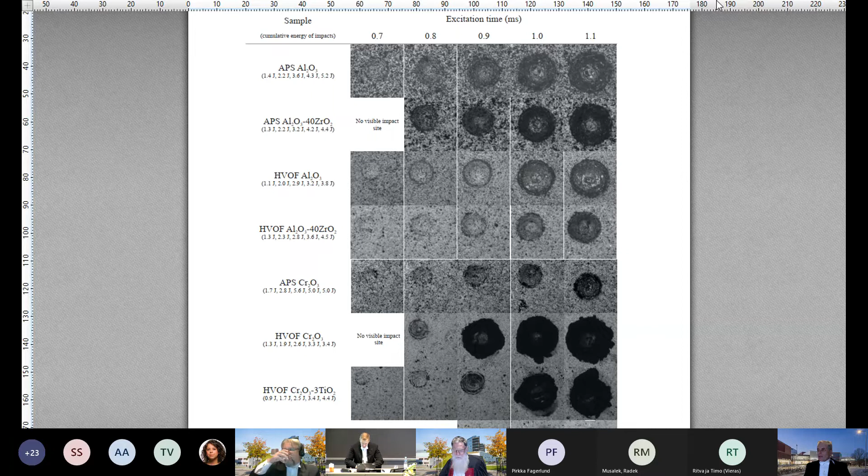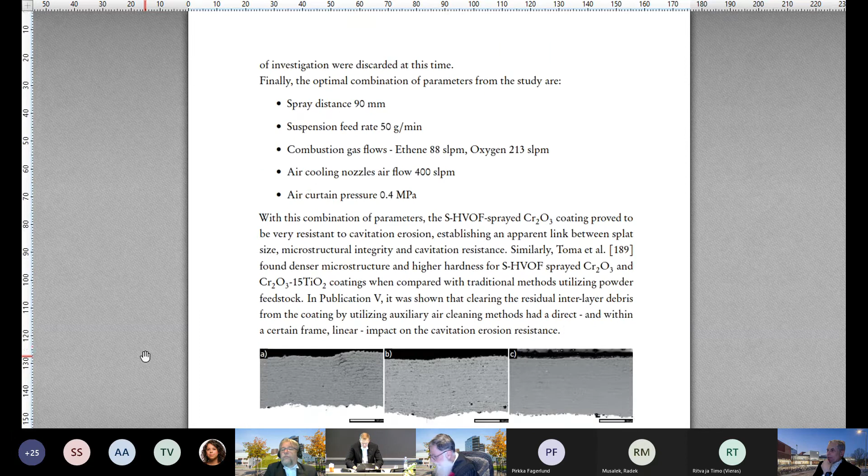And what can you say about the cracks and defects that you see here? They seem to be quite catastrophic. Yes, indeed. So here it was a bit of a naivety in the beginning to not consider that this test obviously goes to the substrate. As you see, the substrate is deformed. And if we would be successful finding or making a damage-tolerant ceramic coating, it would have a coating that is reasonably intact after all this.

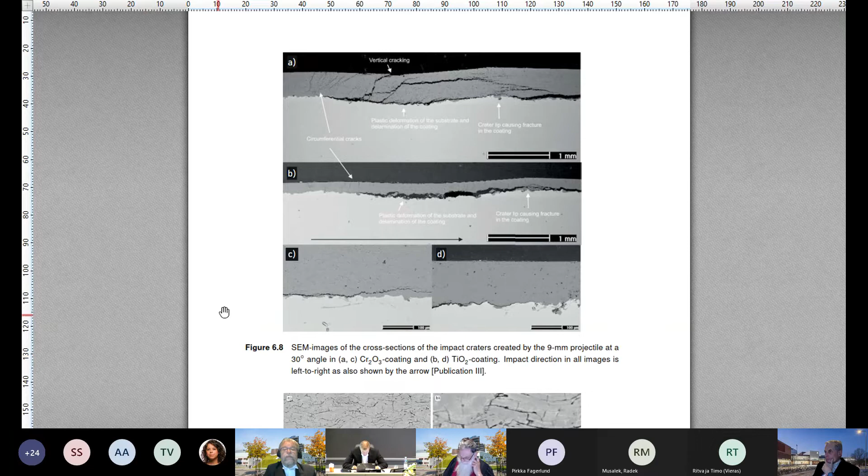But so what can I see here? Basically, with the thicker coating, I want to say theoretically that the Hertzian stress concentration depth is within the coating, and that's why we see so much cracking inside the coating, whereas with the thinner one, it goes over and it's actually thin enough to stay in one piece, if that makes sense.

Yes. Sorry, in publication 3, you have also another image, this figure 7. If you can jump to paper 3. I will come there.

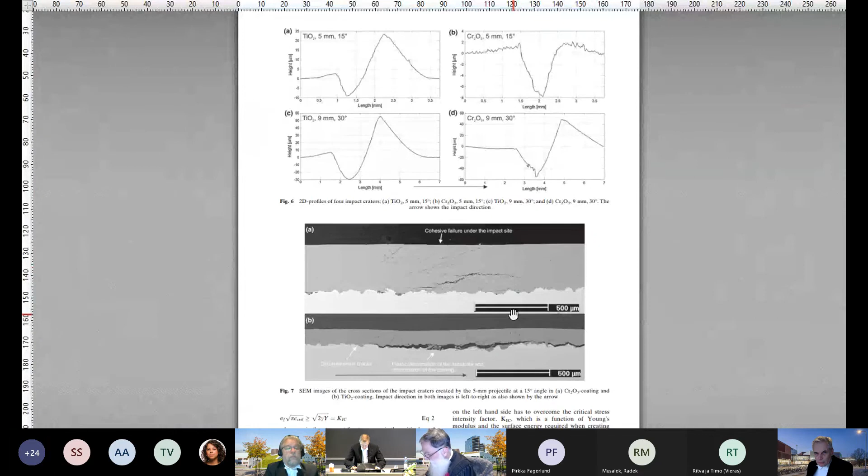Yes, so indeed the coating is about 3 times thicker for the chromium oxide compared to the TiO2. So wouldn't it be very difficult to compare these two materials when you have such difference in the thickness of the coating?

Yes, and I try to steer away from direct comparison because of that. We did the cross section afterwards and saw that it had gone so thin in the preparation for the test. So at first glance after the test with the profilometer, you do these before you break the crater. You see different behavior, and then you cut it open and you realize that it's thinner. So I tried to see what's the good and the bad with each coating individually.

So these coatings were vacuum impregnated before you cut them? Yes.

The other thing which I find interesting is that there's no benchmarking with regards to classical materials, in other words uncoated materials. How would you address that type of comment?

Well, that would be, especially knowing now what I know of this test, the idea of adding the ceramic coating would not be to increase the ballistic protection of the steel. So we wouldn't be considering the properties of the substrate material that much. It's more in a characterization of the coating.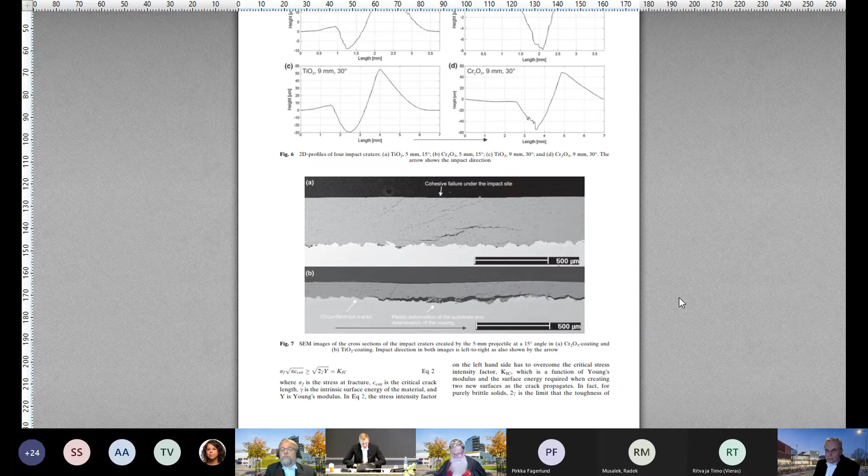Oh, that's a valid thought. As my thought process has evolved during the thesis, it is more about the system itself, and different bond coats can definitely have a different effect. So this would be, as you said, an energy sponge for the cracks. Okay, thank you.

Okay, if we go back to the original run, maybe we were on page 78. I mean, yeah. Now, I think this was very interesting.

After that, we have this Raman experiment. So you apply Raman and measure the stress of the coating, and the reference is the scratch residue particles, am I right? Yes. So you do an erosion or wear of the surface, and then you monitor the particles. That would be the zero residual stress reference, and then the coating would be compared to that.

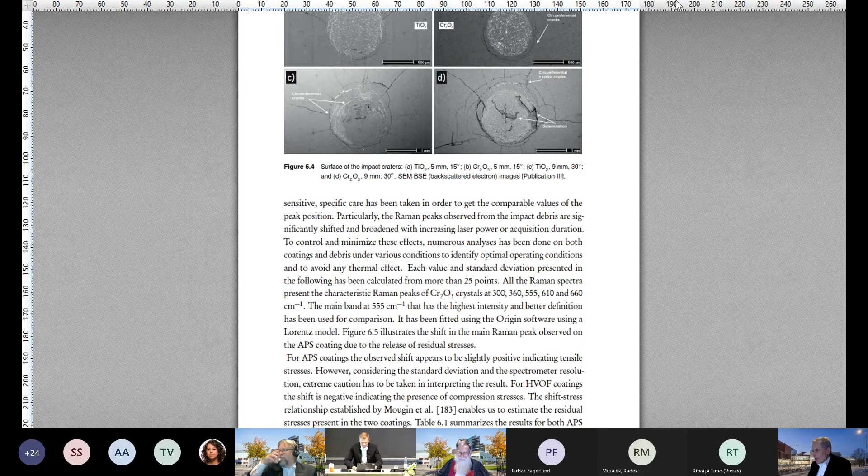Okay, one thing. I'm not 100% sure, I haven't looked at it previously, but to me it sounds like one should expect that when there is compression, you should go to higher wave number, and when you have tension, you go to lower wave number. So in this table 6.1, it looks like the opposite.

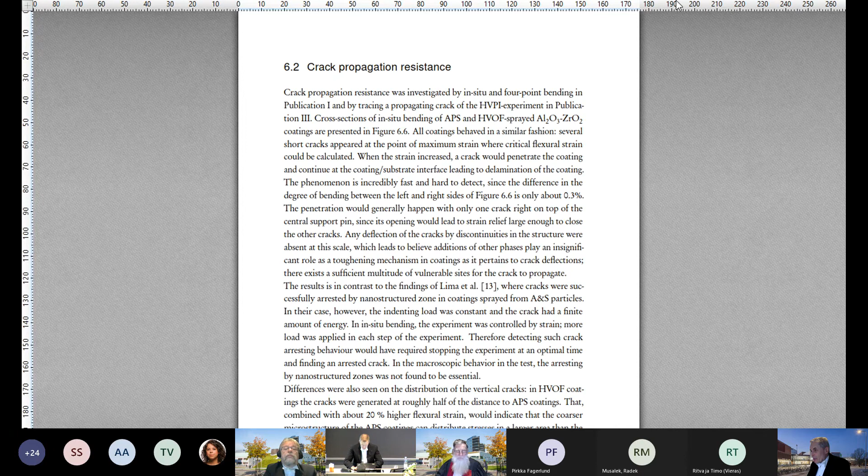Yes, so you might want to check that once more. If you look at reference 183, that's what actually occurs to me. So when you have a compressed state, you actually have a higher shift in the vibration phases, so the excitation should be higher. But it could be that there is just a little discrepancy, but the result is still quite understandable.

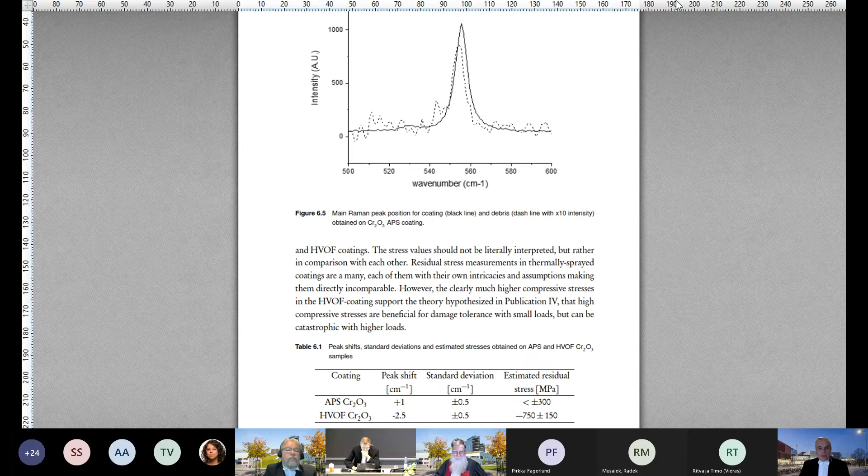I'm convinced that this is the way to actually measure the coating stresses. In fact, looking at figure 6.5, that's what happens for the plasma sprayed coating. The dotted line is shifted to a lower number, meaning... you are right, yeah, going to the higher number.

Yeah, that could be just some misunderstanding of the results, but I'm still convinced that this is a powerful method and good indication.

Yeah, I think it only shows the value of peer-reviewed articles, because when you submit that, it goes through a careful investigation, and there are so many places where you can check it, but this is a little bit risky to put original stuff here. Yeah, but I might be also wrong, but that's anyway - might check that. Good point to check.

Chris, do you want to continue? I want to look at figure 6.7.

Yeah, that's an interesting one. And what does it mean? I had identical question myself.

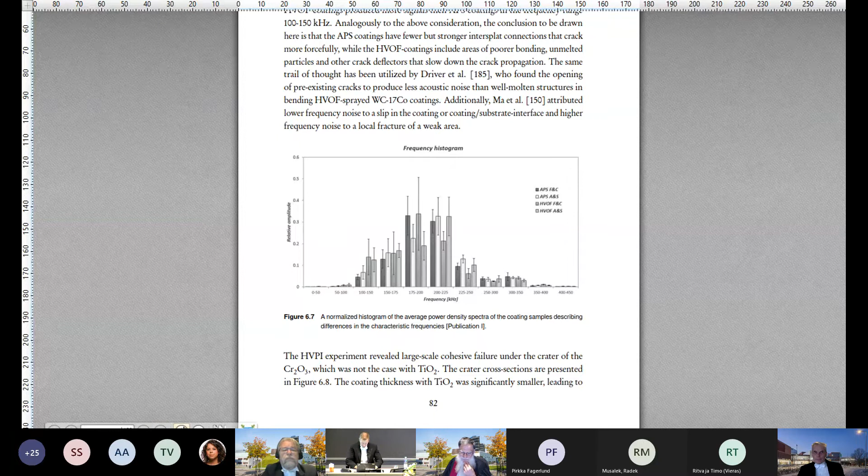So let's look at the frequencies of, say, the bins from 200 to 225. Yes, so that bin is filled, is populated across the entire test. Does that worry you?

No, not so much. What I'm trying to say, hopefully I can be a little bit clearer now, is that within—that bin is filled across the entire test.

That means that you've got a certain type of crack being generated across the entire test. That means that there's no initiation point for a macro crack, for example.

No, I believe these cracks could all come at one point during the bending test, but their cumulative amplitude is high enough to put them high in this chart. So in the beginning there might not be any of this frequency, nor in the end—there is one point where there's a lot, but this graph is of all duration.

So do you know that, or are you just speculating? I want to say I know it, because in the beginning of the test, there is no sound at all. The AE graph itself is 0, and then it later starts.

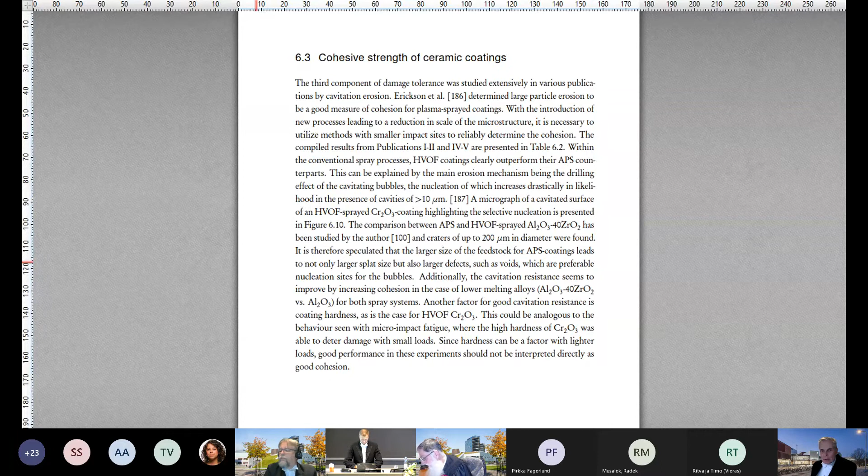We have cavitation there. So was it so that the surface was not polished before the testing, which would probably make quite a difference?

In the beginning of my doctoral researcher's career, I did polish them based on convention from metallic materials, but I did find that for the ceramics there is very small, basically none at all, incubation period, but the damage is quite linear.

So because it starts cracking right away, you get these initiation sites, there's no deformation. So then the test is quite laborious, and I decided that I can skip this part and get equally representative results. In any case, to calculate the cavitation erosion resistance, we use data points from the end of the test to eliminate any incubation. In all materials we have been doing that type of analysis.

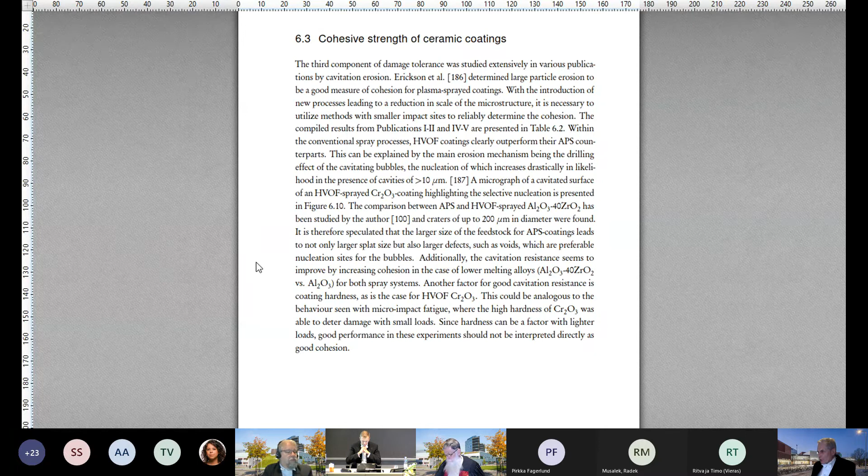So it was by weighing. Yeah, I think this is a nice result, this table 6.2, that you do get clear differences, and however you seem to have HVOF quite superior in this.

The same types of results you also get for the micro impact, or how do you compare this, let's say, excellence in cavitation to the other results? Is there anything unexpected, or are they similar?

Well, in the case of cavitation, I believe it comes to scale, because the splats are smaller than with plasma spraying. They essentially are the same size or slightly larger than the cavitating bubbles. And if there are some splats that are detached, it's a small splat that leaves a small dent. That's not a big incubation site. Whereas with the plasma coatings, you have big splats that are well adhered because they're well molten, and the cavitation kind of drills one piece around and it becomes a site for the next bubble. So there was a big difference between them here.

Whereas in the micro impact fatigue test, I want to say it's more about the compressive stresses, for example, and the density and hardness, more macroscopic properties.

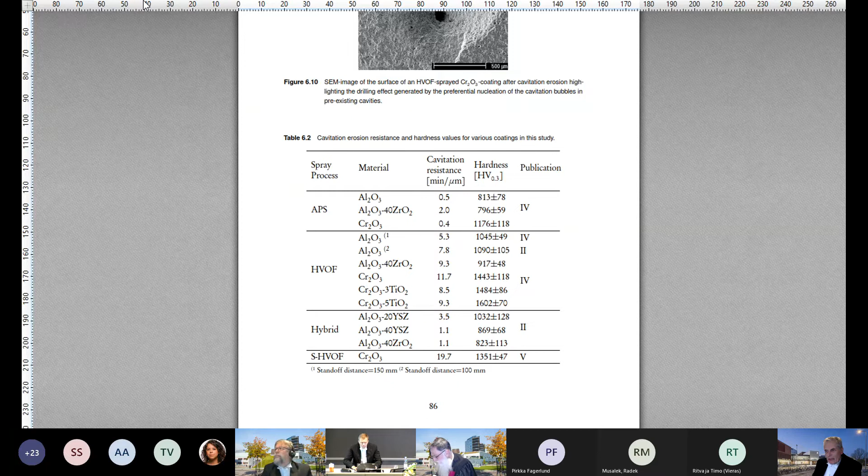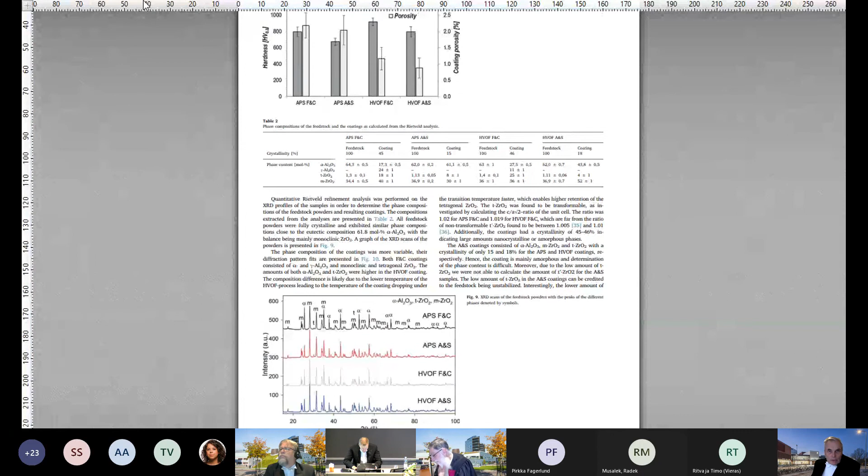I still want to attack the issue of hardness and something in paper 1. You have this comparison. Well, I guess it's porosity, but it's in the same figure 8 in publication 1. You also, I think there is a figure 8. Yes. Here.

So is there a notion that there is always a better... both spray methods show that the coatings are more porous when they are FC materials, as opposed to AS. Fused and crushed and agglomerated, or what was it?

But if you look at image number 8, I would say that they are identical, taking into account the deviation of those measurements. Yeah, they do fall within the deviation, but it's a propensity to find conclusions, I guess. Based on these deviations and averages, it's likely that this would be the case if you would continue testing more and getting the deviation lower.

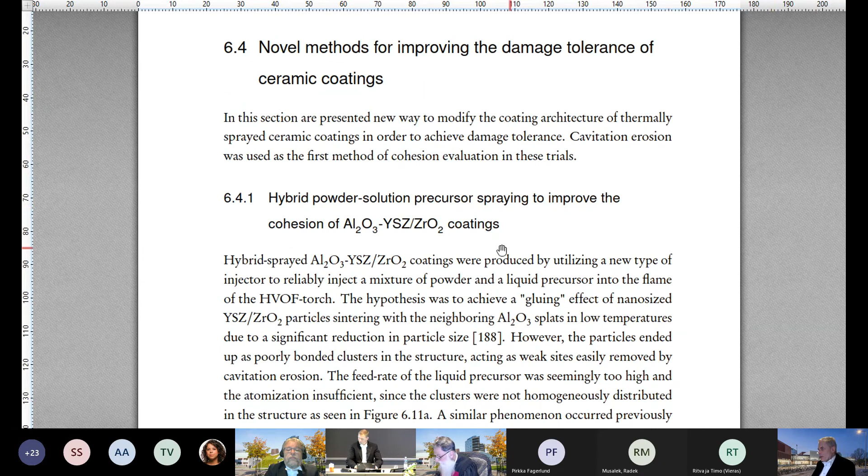Okay, then if we proceed with this original introduction part to the chapter 6.4, the hybrid method. So indeed, in figure 6.11, you see this agglomerate, these like pockets of powder inside. Mm-hmm. Is there any way of avoiding that?

It's a good question. It's hard to say since the porosity comes from the microscopic features of the coating, so that will likely be there. But to fill them with not powder but melted nanoparticles would be the key. And I still want to say it could be done by further process parameter optimization. I'm an optimist that it could be done. Yeah, how would you approach that?

Well, in our case with the HVOF, it's tough. The YSZ or zirconia have such a high melting point that with HVOF it's very tricky, at least with the current setup, maybe with a special version. But with the plasma, you could try to increase temperature for sure, or maybe inject the solution in a different part of the plasma. Okay. Where do you think this agglomeration takes place in the process?

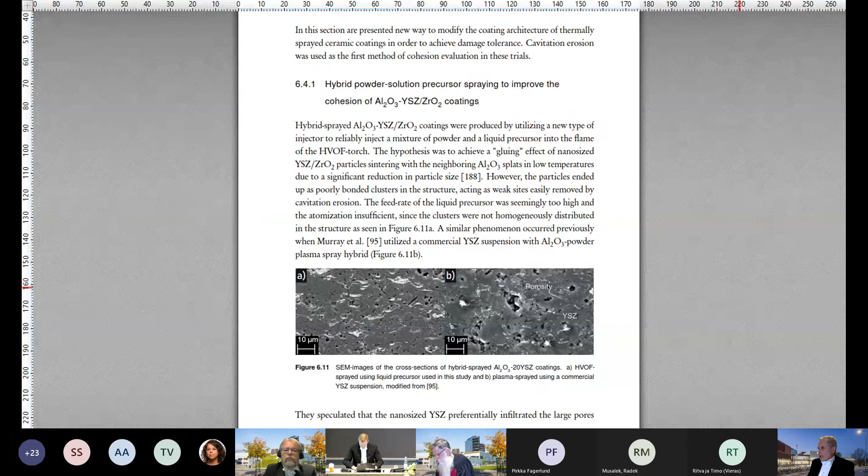If we want to proceed further, I would go to the results presented in paper 5. I think there's a nice optimum and incredible differences in the cross sections demonstrated in paper 5, figure 6.12. I think it's a good result. I don't have any critical comment on that. I would actually go to the conclusions, unless Chris, you have something you want to stay on in the results and discussion part.

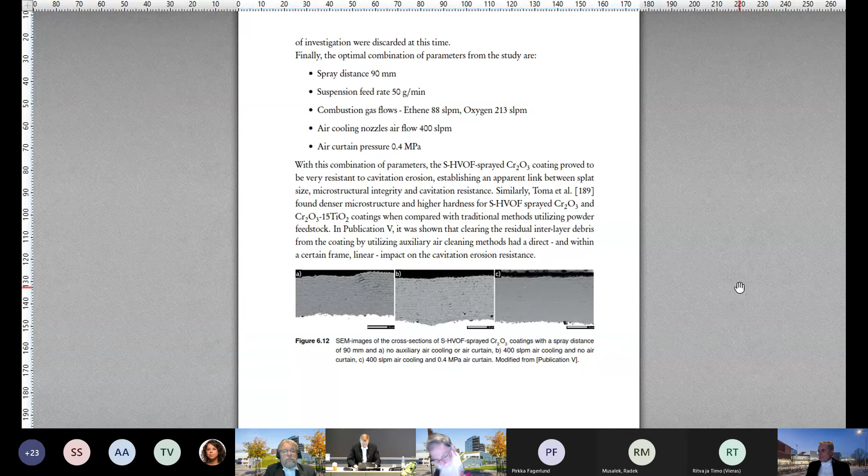I'll leave my discussion points; they will become apparent when we talk about the next section, section 7, conclusions. Yeah. Let's move on. Yeah, I think you very systematically draw these conclusions. But there is no straightforward way to solve these issues.

I think the threshold for coating damage was shown in this paper, that you could actually evaluate that, and it could be used as a measurement method. And you summarize that there is no one method of measuring the system's property of damage tolerance, but that micro impact fatigue would be the most effective. I would very much agree with that based on this evidence.

So what I would ask Jarkko for is one bullet or two bullets or three bullets. You're going to think I'm very lazy, right? But with regards to the conclusions, what would be the executive summary? Well, to sum it up. Very briefly, what would be the so-called elevator summary?